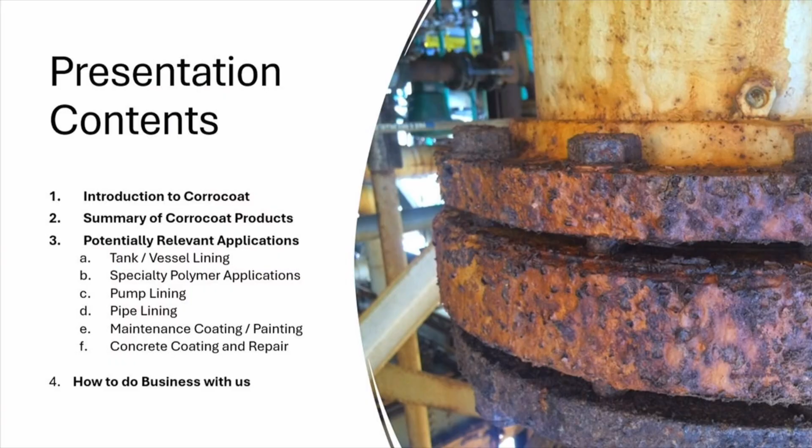So Corrocoat: we exist to engineer corrosion-resistant coating solutions for aggressive service environments, across a variety of substrates — pipes, pumps, concrete, tanks, tank linings, internals, externals, and fiberglass repair. We specialize in the difficult applications. We will do the easy stuff as well, but typically we start with someone saying, 'here, this is my most difficult problem, can you help me solve it?' We're glad to do that.

In the U.S., here's just a snapshot of some of our customers. I'd say about 50% of our business is in energy, whether that's power generation or oil and gas. We also do petrochemical, marine, some food and beverage, and then there's always oddball inquiries. We do some wastewater — wherever there's corrosion that's aggressive enough to warrant the investment to do it right and make something last a long time, or sometimes it won't be as corrosive but access is a problem. Equally, if it costs a lot of money to access something, you don't want to have to do it again.

The Corrocoat business model flows right along with Qualitech to where we can be a single source solution. Qualitech as a licensee is able to apply the product as well as specify and supply it. So Corrocoat operates to where if you have a problem, you contact Cindy, you contact Qualitech. She's going to understand the problem almost like a doctor would. We're going to ask you questions to diagnose what needs to be done. If we have a solution to that, then we'll supply the product and apply it. It's a single source solution.

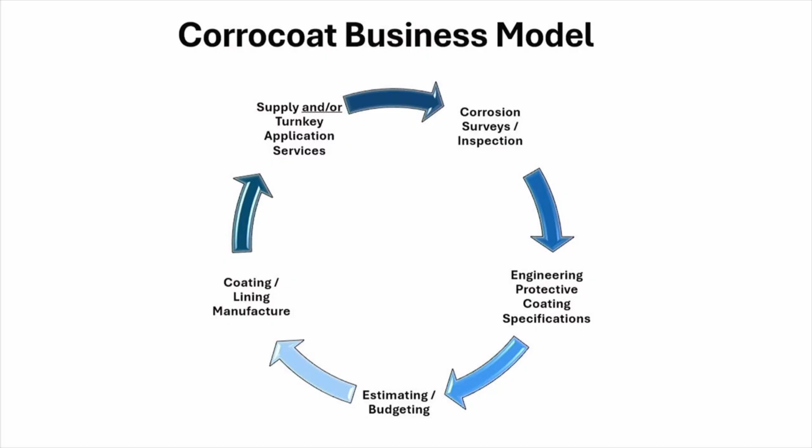We manufacture in five locations: the head office in the UK, and also in the US, India, Kazakhstan, and Japan.

I could also call this 'do it right the second time,' because people usually don't get it right the first time. But when you have a corrosion problem, it's important to understand where the costs really are. Generally it's not in the bucket, despite your paint salesman saying 'I've got a product that works and it's 5% less expensive.' Based on my experience, being a turnkey solution as the contractor as well as the manufacturer, the cost of the coating in the project is only about 5%. Most of the cost is downtime, engineering, access. You see a guy here on scaffolding in an outlet duct, 175 feet off the ground, abrasive blasting - that's where the cost is.

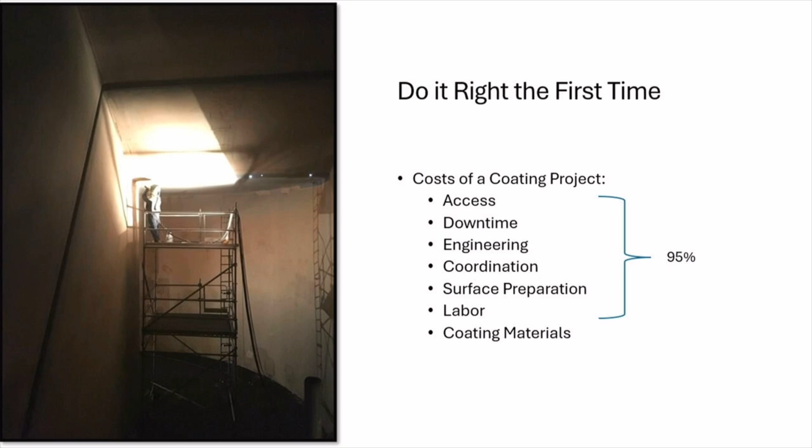It's highly dangerous work to be able to do the correct surface preparation for pretty much any coating that you're going to apply. So if you're going to go through all of that trouble, it's good to get the spec right, and make sure you're dealing with a partner who's going to take full responsibility.

Corrocoat operates naturally on the Pareto principle. I'd say about 80% of our specs end up being glass-flake vinyl ester - that's when we're looking at internal linings. The vinyl ester resin, particularly Novolac vinyl ester resins, have extreme temperature resistance and chemical resistance. That stated, we also make polyester-based resin coatings, also glass-flake reinforced, a variety of different epoxy resin-based coatings, specialty coatings, and surface-tolerant primers for when blasting isn't feasible. So we can do a lot of things with our technology and experience.

We have an in-house R&D that continues to work - a full-time staff and some really expensive equipment in England, so we're always improving our existing coatings and creating new coatings as new technology comes out in resin systems and different additives, in addition to responding to the marketplace. We can make a custom coating to fit your need - it just needs to be something we feel is going to be commercially viable elsewhere. So if something really, really cool comes up, please let us know - that's what keeps me going. We may or may not be able to cater to that.

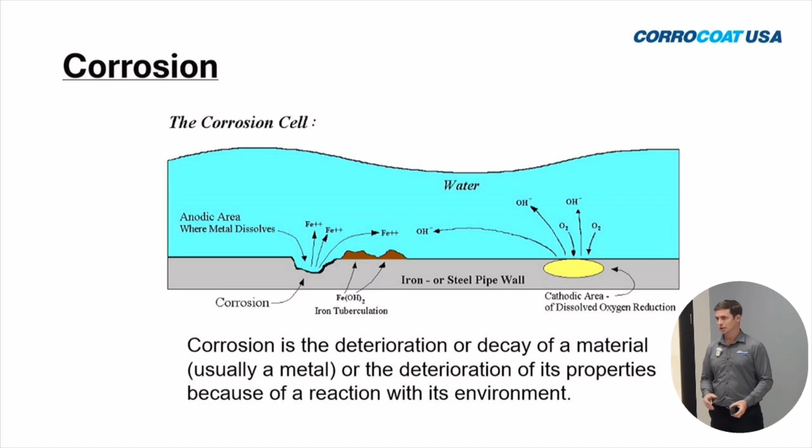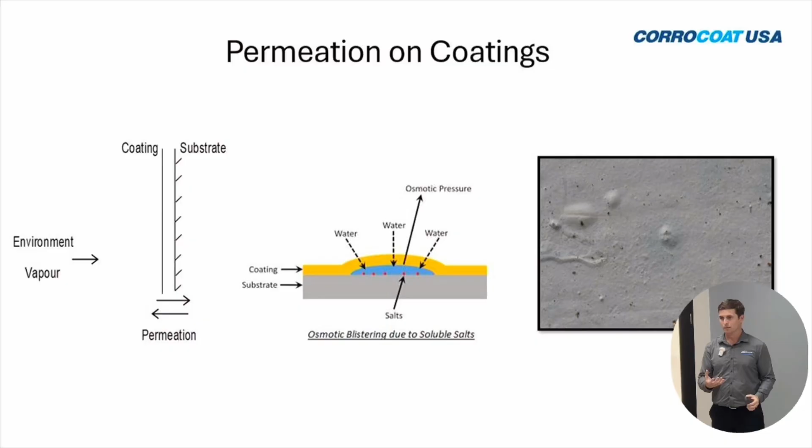We look to protect it. Practically, as you can see in this picture, whenever you're looking at fabric maintenance or internal linings, over time you may see permeation through the given coating film, which will allow moisture or other corrosion-causing ions to get through the film and to the substrate. It starts to corrode, you get a bubble. The reason that happens is because you have a tendency towards permeation. When you have a film between differential pressures, gas is going to want to try to fill that void. That's the natural phenomenon that we're fighting.

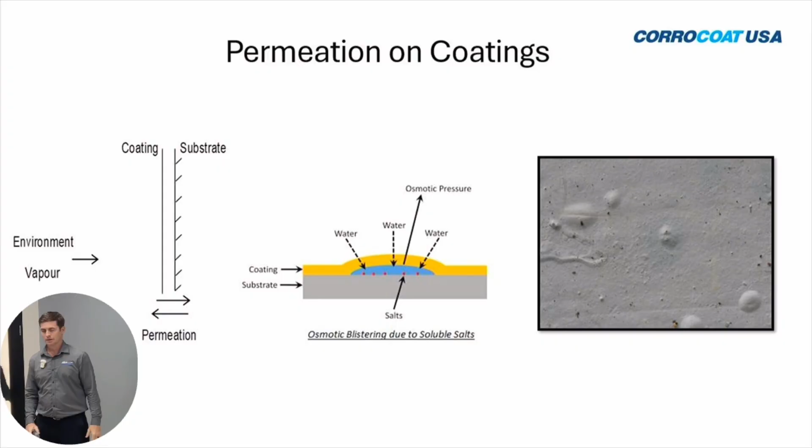Corrocoat is based on glass-flake technology. In the early 70s, the founder of Corrocoat, while still working his regular job, started tinkering with resins and glass flakes in his garage until he found a formulation that he liked.

The idea is that if you put glass flakes in a coating and load them correctly, and put other additives and fillers to ensure you get the viscosity right, you can create a situation where the corrosion-causing ions go into a tortuous path.

These are free film samples of coating, but they work here as well. Imagine these were glass flakes, 3 microns by 100 microns, so 3 microns thick by 100 microns diameter. For reference, the average human hair is about 70 microns diameter. So we're talking about really small chemistry or physical properties.

Within that layer, you've created a situation where you lose momentum, and now you have a liquid-applied barrier coating. Without the glass flakes, or something that has a shape and will line up like that, you have to put more coating on to get the same resistance to permeation.

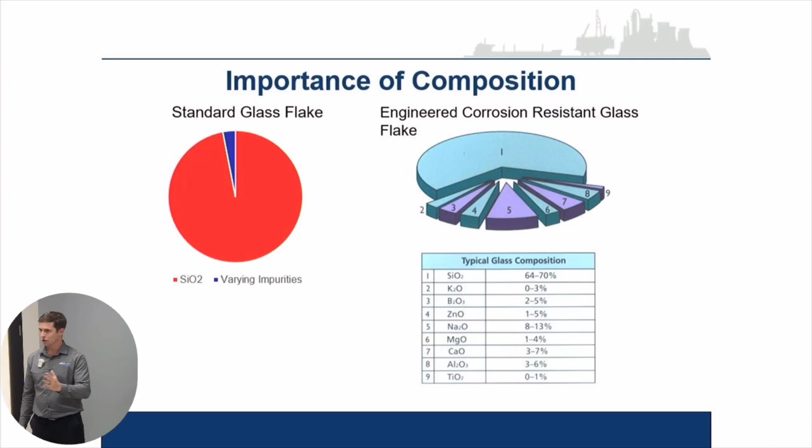So that we have extra corrosion resistant glass flake, the idea is that in heavy chemical environments, it's not good enough to only have that tortuous path with water. You also want a glass flake and resin system that will resist and is inert to a wide range of chemicals. So the glass flake is the backbone of these coatings. The resin selection varies depending on temperature, chemicals, and service, but having that effective glass flake loading is what really, really makes us different.

We don't just pour the glass flake into a vat, spin it around and say, yeah, that's good. We do extensive testing when we're creating coatings and when we're testing against different service environments, sometimes to prove to ourselves, sometimes to prove to customers. So these are 4 of about 2 dozen tests.

So we'll do the cold wall test. Has anybody heard of the cold wall test? An Atlas cell test? No. The cold wall test utilizes coated plates and a translucent tube. The beauty of this, particularly when you're testing for high pressure or high temperature and chemical, is you can put a given chemical in there, the exact same chemical, to mimic the environment, alter the pressure and alter the temperature to ensure that you can handle that.

Now, we don't only do that for the operating environment. Most customers will want us to do that test for the maximum operating temperature or in upset conditions. We will test it to failure in some cases because you want to know how far the coating will go. Whenever you're looking at separation vessels and process vessels, you want to know the limit because these are really, really important vessels to a process. That $100,000 tank lining is a drop in the bucket compared to the downtime for some of these things.

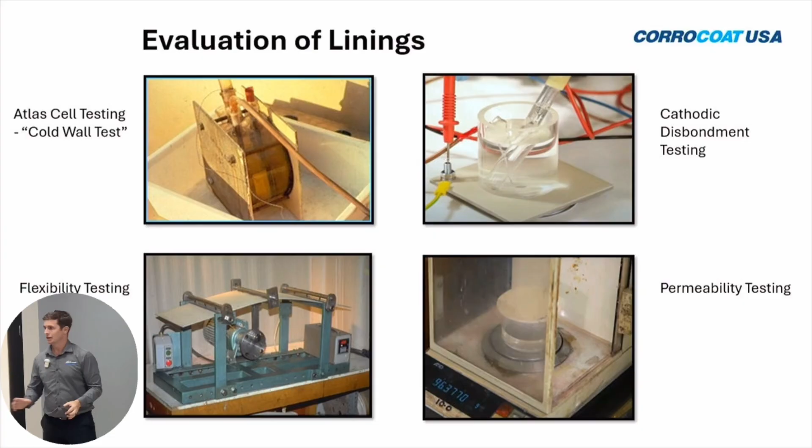And then, of course, permeability testing. This test uses a free film sample, kind of like this. You put water in here, you have variable pressures and time, and then you monitor how much water is lost. It's a relatively simple test, but it's standard: ASTM D1653, for those of you who want to look it up later.

We've seen, one of the tests, is the product with the glass flake much better than that resin system in fiberglass. So we'll do that. Good science only changes one variable, and then you monitor the results. We're a full magnitude less than a lot of the competing glass flake coatings, and even less as far as permeation than fiberglass.

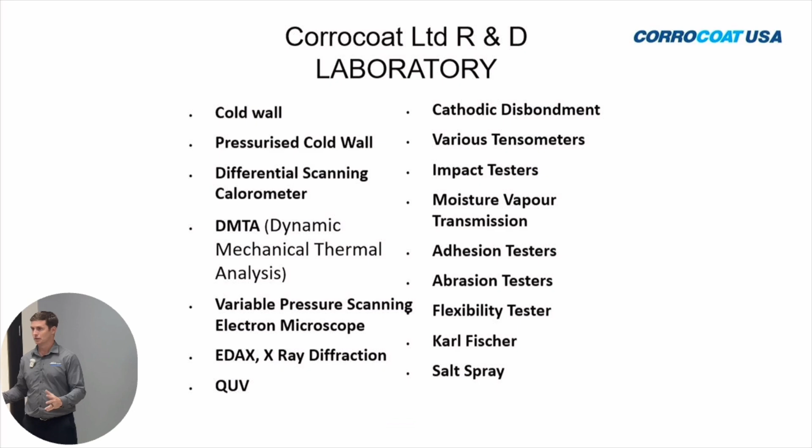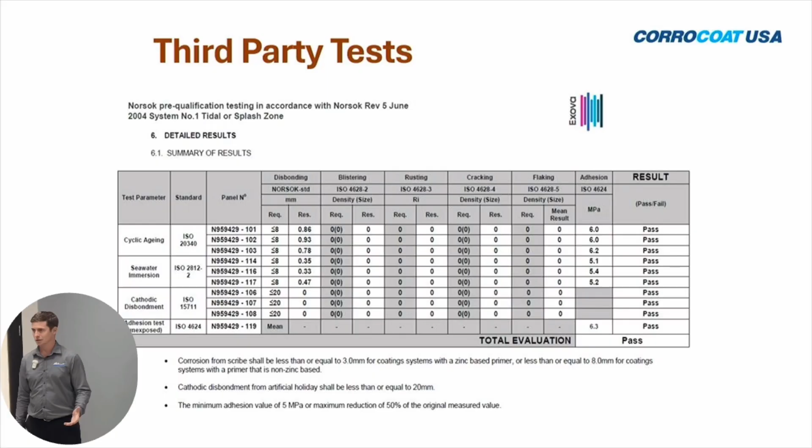So just keep that in mind - sometimes we will do that as an additional service. Not everybody takes our word for it; sometimes they want third-party testing, and we're happy to do that. If you want comparative testing, and you have the money, we're happy to do that as well. I've done very well in comparative testing over the years against all of the big boys, all of the names that you may have heard of.

All right, so Corrocoat specialty coatings. We talked a little bit about the VE, and I told you about the Pareto principle. We spec it a lot, so bear with me - pH 1 to 13, up to 230F.

We're going to talk about Corrothane XT in a minute as well. I have some slides dedicated to these. Corrothane XT is a high temperature version of the VEF - it's a vinyl ester urethane copolymer. That'll get up to 300 F immersed, and 500 F non-immersed.

We have the AR4. So the Novolac vinyl ester is really good - it uses cobalt as a promoter. The problem with cobalt is in high pH situations, the cobalt can be attacked. So we will substitute the brominated vinyl ester, the Corroglass AR4, in those situations. I think we're doing a project with AR4 coming up at Promont. The downside to the AR4 and the bromine, the reason why we don't use it on everything as a promoter, is it's not as good of a promoter as the cobalt, so you have to add heat to get a full cure. Still, it is the best solution around.

We can handle fully saturated concentrations of sodium hypo, sodium hydroxide, all of the good stuff whenever you're looking at caustics. I mean, I guess alum would be the only other one that you would ever see.

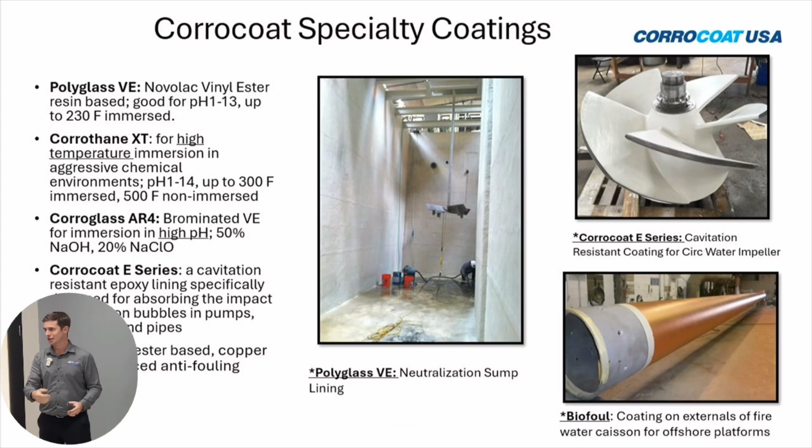Yeah, so the biofoul is a polyester resin-based coating that utilizes elemental copper flake. The copper emits ions, which the biological growth will not adhere to. So it's not like your traditional anti-foulant, which is ablative, which has multiple colors and multiple coats, and the fouling just peels off - and then you get to green and you say, I need to coat again. This is a fully functional, long-lasting barrier coating.

So some of the epoxy coatings, Plasmet ZF - this is our surface-tolerant epoxy coating. It utilizes glass-flake and micaceous iron oxide. You fight rust with rust in that situation. And then other proprietary components which help increase the passivation of the surface as well as make it surface tolerant.

We've been fortunate enough - and I have other slides, so I don't want to duplicate too much. About 7 years ago, one of the big players in the oil and gas world asked us to put this product, Plasmet ZF, in an aerosol can. We're able to do that. Give it a little cliffhanger - we'll talk more about it in a little while.

Plasmet AR3, which you're using at Promont as well. The AR3 is 98% sulfuric acid resistant - that's for full immersion or for secondary containments. In general industry, I see a lot of inquiries for secondary containments or maybe U-drains, which are particularly nasty and fun to deal with.

We have the Zip E. So you see a picture here - this is a project that we did 8 or 9 years ago in South Carolina. On the bridge going to Hilton Head, South Carolina, there are 2 transmission poles like this. One of them, they had too deep, so it's in the tidal zone.

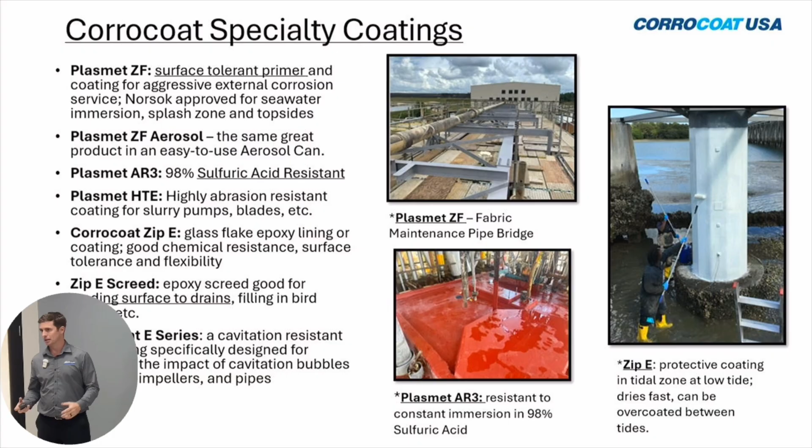So the tide went back up, we went back through again. Even though it had been in water, it was still in its active phase of polymerization. So we wiped it down, put 2 more coats on, still fine. It's perfect. These are the type of mission impossibles that Corrocoat thrives in.

Application characteristics. So it's more than just the glass flake, and it's more than just the physical properties and the chemical properties of the resins. You also want to understand application characteristics.

Gel time, pot life, just a few vocabulary words. So pot life or gel time, that's the time it takes between when you mix the part A and the part B for it to go from a liquid to a solid.

Shelf life, generally that's pretty static for us. So the vinyl esters are getting 6 months, the polyesters are getting a year. The epoxy coatings are stated at 2 years, but we've seen them last much, much, much longer.

Viscosity, so I have a couple pictures here to illustrate viscosity. One of the levers that we can pull whenever we're making coatings to make them effective for the given use is viscosity. So the same chemistry and the same service, the same resistance, but in 2 different thicknesses.

In certain cases, like whenever you're looking at a cove base or when you're trying to fill pits, you want something that's thick and can be trowel applied. In this case, they're using a little Bondo knife.

And then in other cases, we have a blind vane on a pump. You want it to be so thin that it's pourable. We were able to rig up a caulking gun, essentially, to pump. We mixed it up and we were able to pump the coating in so that it drained out in this blind vane. You move it around, you look at it with a mirror, you literally rinse and repeat.

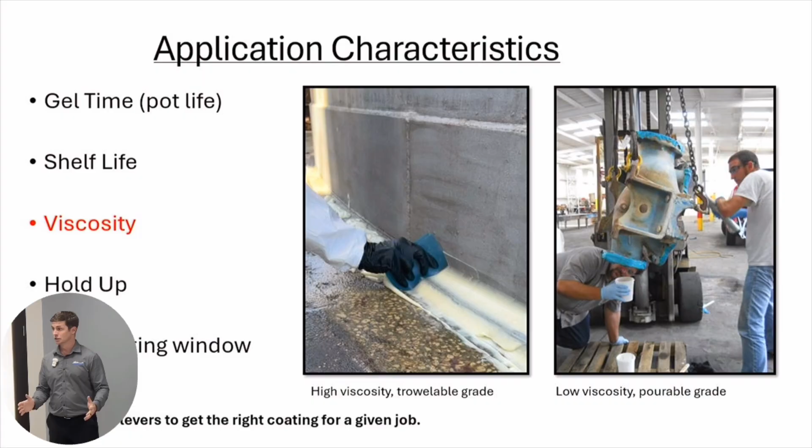If you miss that overcoating window, you don't have to start over. You typically will just have to sweep blast and get a new profile onto the surface, which can be expensive. It's not ideal, it's not the end of the world, but it does cost more. So when we plan projects for given coatings, we want to understand their overcoating window so that sometimes you may have to work odd shifts, you may have to have 2 shifts, or you may just resolve: I'm going to put a coat on and then I'm going to miss it and then I'm going to sweep blast.

Understanding the whole process is important, particularly whenever you're dealing with this sort of stuff, so that you can have a project from start to finish that lasts and works and doesn't cost an arm and a leg.

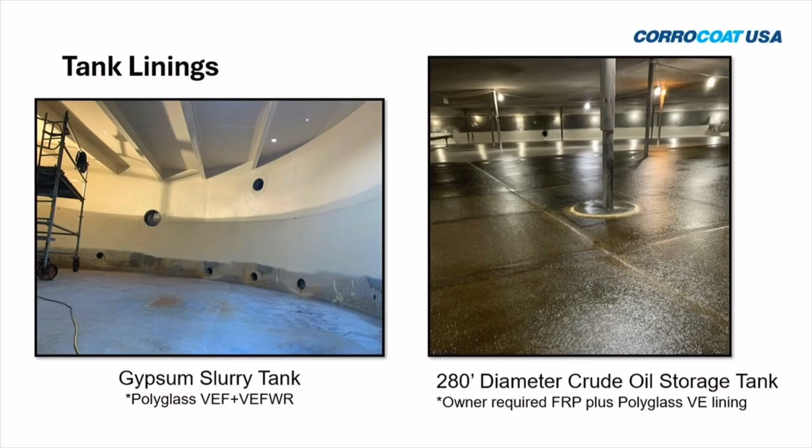We supplied coating for this system. We prefer turnkey, but in certain situations there are nested contractors where it makes sense for us to just supply the coating and or support. So if you're offshore and it's a relatively straightforward application, that might be the way - you buy the buckets, and ideally you may want to get some support as well from Qualitech. This is a 280-foot diameter crude oil storage tank - 2 40-foot containers full, so about 8,000 gallons worth of coating. A lot of coating.

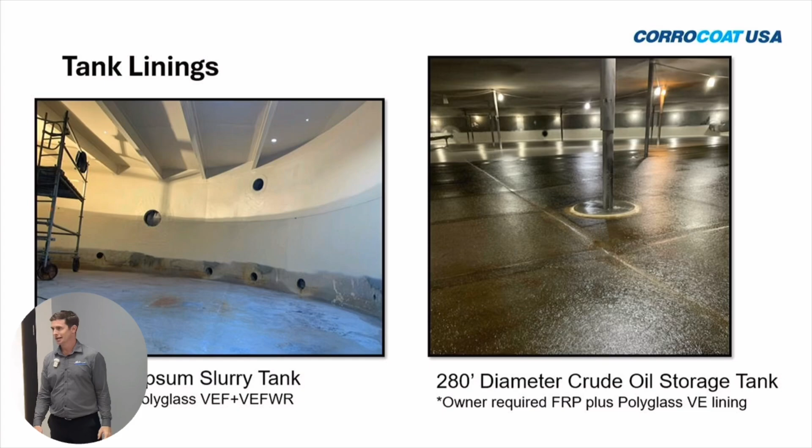This is just a cool picture. It's a process tank that we did. Whenever we're looking at process tanks, it's important to understand the sequencing. If I ask you for an inquiry on a process tank, I want more than just 'it has hydrogen peroxide and it's dosed with hydrochloric acid at 10%.' I do need that information, but I also need to know the sequencing and what the base is. I want to understand if we're going to worry about exothermic reactions that may or may not be beyond the temperature resistance of the coating. I want to understand whether what you're dosing in there is miscible with the solution. If it's not miscible, you may have a hot spot. If you put 20% hydrogen peroxide into a tank, but you're only putting in 1% of it, that's not a very high concentration - the coating will handle it. But if it's not miscible in the tank and it falls to the bottom, now that might be beyond the chemical resistance of the coating. These little details can be the difference between a successful project and one that's a really big problem for everybody involved.

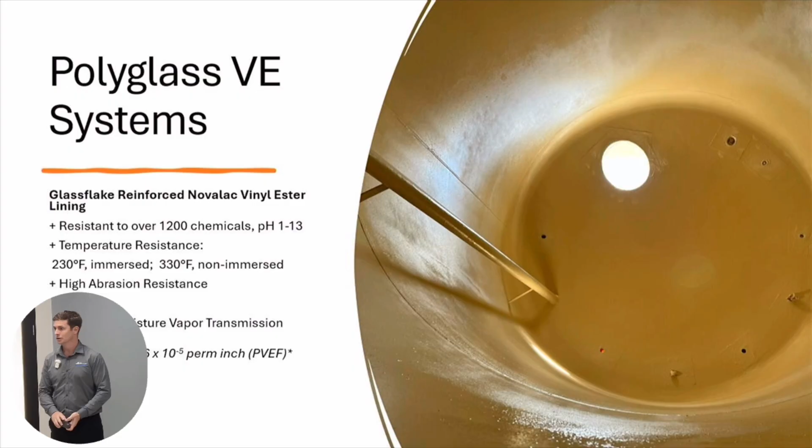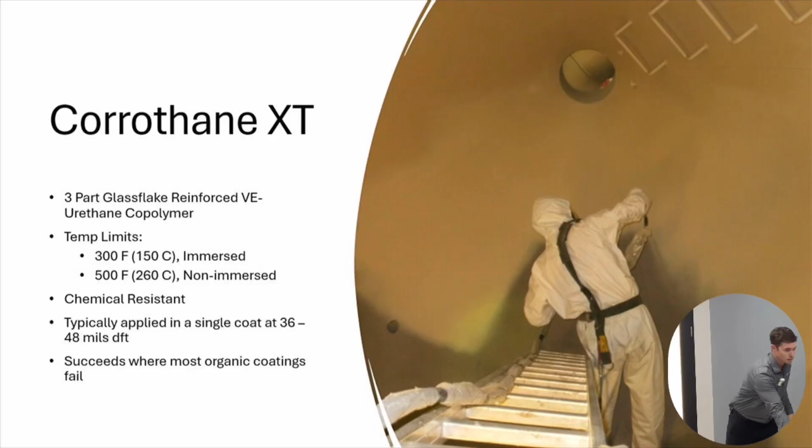Corrothane XT - there we go. I've got C on here, 150C, 260C. So the Corrothane XT works a little differently - you actually have to mix it. It's a step-down mix. You mix in the urethane and the urethane diisocyanate, which will catalyze the urethane. You let that sit, then you mix in the MEKP, the organic peroxide, which catalyzes the vinyl ester. You step that and you time it. The idea is you get a thixotrope of each material, the urethane and the vinyl ester, and they wrap around each other like two ropes, or like two snakes mating. The idea is you have this double thixotrope wrapped around like a really sturdy rope. Whenever the temperature rises, those thixotropes expand and close the gap, so you have an even better moisture vapor transmission resistance. That's the difference between this product and the standard vinyl ester. This is a product that will succeed where a lot of other coatings can't.

We'll use this in ion exchange vessels that are high temperature. Test separators - a lot of times the VE will work fine in the production separators, but the test separators, where you're going to see higher temperature, it works well there. For CUI, corrosion under insulation, you want to specify for the immersion conditions, not the non-immersion conditions. If you're having CUI, it's because you have moisture on the surface. That's a common problem with specifying corrosion under insulation - excuse me, you look at the wrong number.

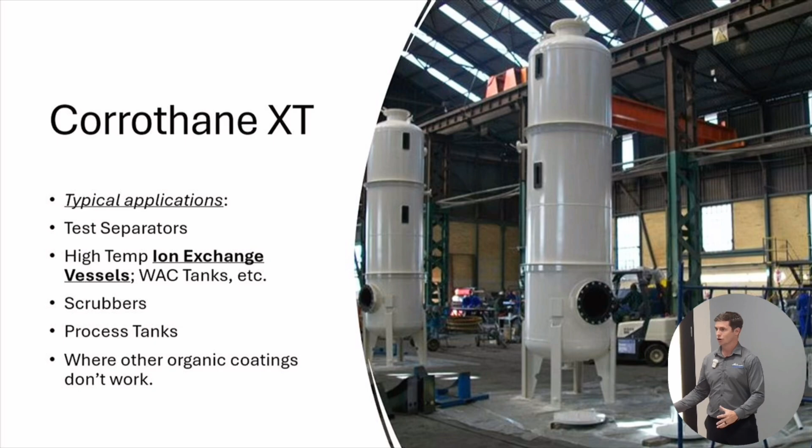So this is a specialty coating. This is the type of coating that only Qualitech would be able to apply. Certain applications and coatings, we're not going to sell in a bucket and give you support. We're going to say we're going to do it all. It's our reputation on the line, or we're not going to do it.

Different types of tanks and vessels. Do y'all have tank and vessel linings that you deal with, or is it mostly fabric maintenance? Some, yeah.

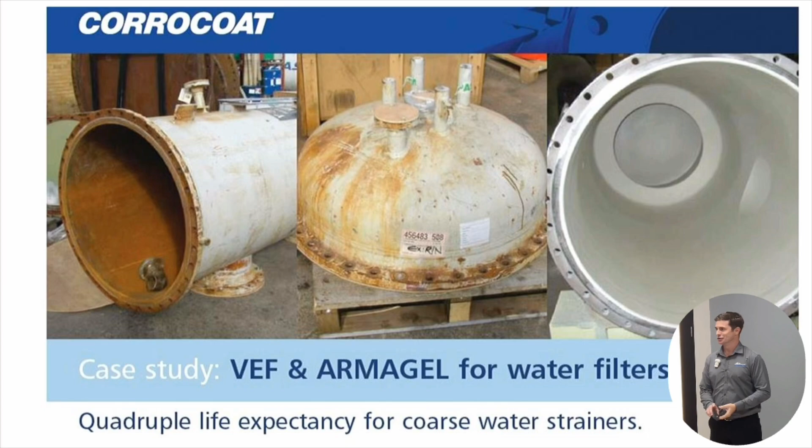Water filters, you know, you get abrasion in certain situations. Armagel is just an earlier evolution of the VEFWR. I actually like the name better, but as you move along, you create new names.

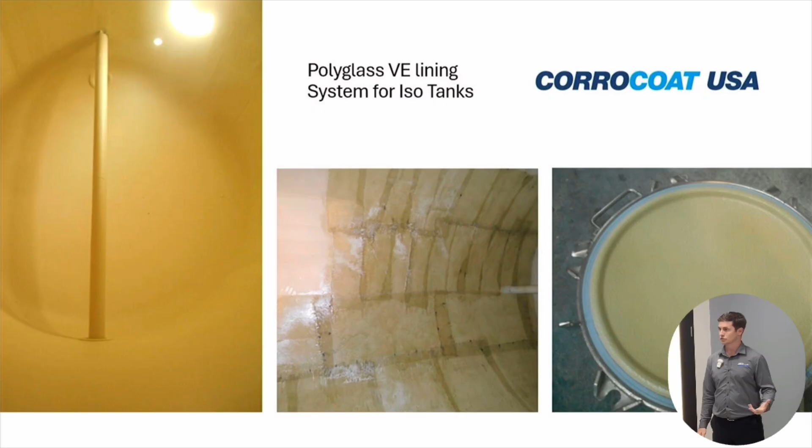Isotainers. This is a hydrochloric acid isotainer. This also works well with frac tanks or produced water tanks, some other bad actors that you may be dealing with.

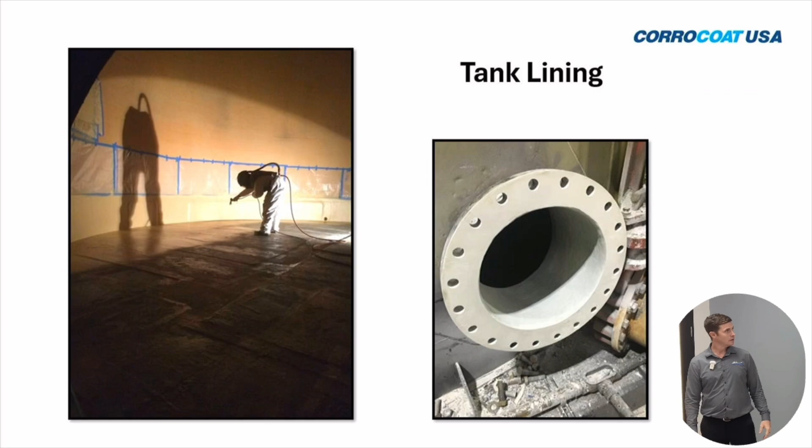You can see this flange here, it's finished flat. We have a better method of dealing with a flange, but in situ, on a big flange like this, it works pretty well. So you see, we'll fiberglass it out.

We make free film samples with the coating. We use those as shims. We essentially glue them to the substrate here. Then we clamp down a piece of laminar board. Wait about 4 hours, pull it off, and then you get a flat flange.

It's much more effective. It leaves a flat finish, plus or minus 0.005. Easy to go onto, particularly with a soft gasket, and it's done. In other situations, I've seen before we started doing this, others spend as much time on the flange faces as they do on the whole tank. So you want to be able to have effective methods like this.

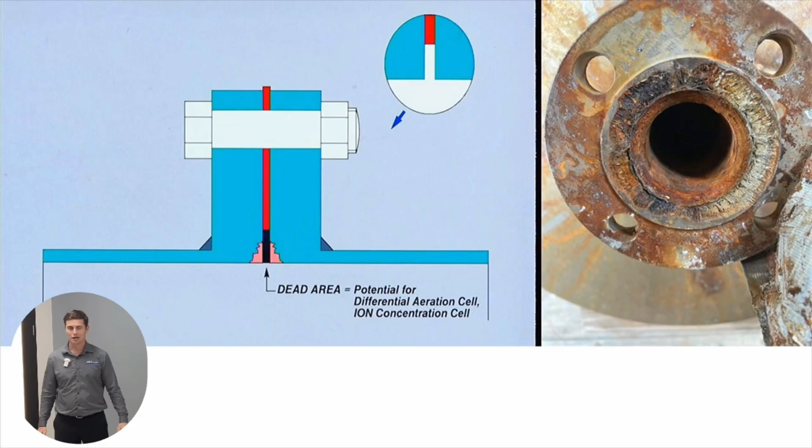Now, do you have any flanges that look like this? Crevice corrosion, it's pretty prevalent. It's the small areas that cause us the biggest problem, it seems like. We deal with that with a spec, I don't know if you've seen it, where we recommend that you rebate the flange down 60 thousandths on the ID. That works great, you fill it with coating.

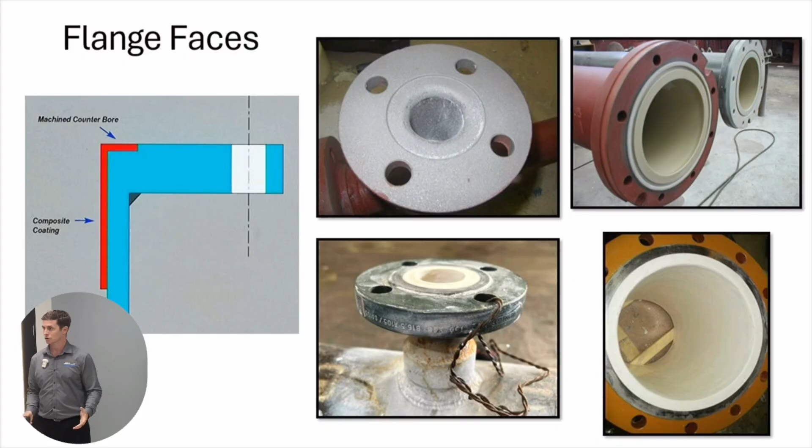The coatings are fully machinable. You can put it on a lathe if that's possible to machine it, but you don't really have to. We're able to get plus or minus 5 thousandths, which is the BP spec, right here, no problem without machining. Some of the more abrasion-resistant coatings are only machinable with a diamond tip. This is some polymer chemistry that has really, really good cross-dimensional stability, and it's very hard.

In situations where you're really in trouble and maybe you spec the wrong metallurgy, you may need to be able to do something in situ. This is a project I went out to help with this summer in the Gulf of America. This is something where we used a casting method. I brought the 1.5 inch because it was easier to fit in the bag.

We fabricate with our machine shop, and Qualitech can do the same, flange formers to spec. So this is a 300-pound flange, raised face, with 125 RMS finish. We sent those offshore. We sent a crew offshore with coating, the Plasmet HT coating.

You paint this with a bond release agent. You blast the coating, or you blast the surface of the flange. I mean, these flanges were eaten up. They were losing seals, it was a major problem.

Fill in the pits, prime it, bolt this to the surface, like you can see my colleague here. Leave it, you torque it down, leave it in place for 4 to 6 hours, pull it off, finish it, and you're done. We did 94 flanges in 9 working days.

The competing solution was going to be 48 flanges in 16 working days. They were on a 12,000 barrel a day deferral for the project. So significant savings using Corrocoat as opposed to the competing method.

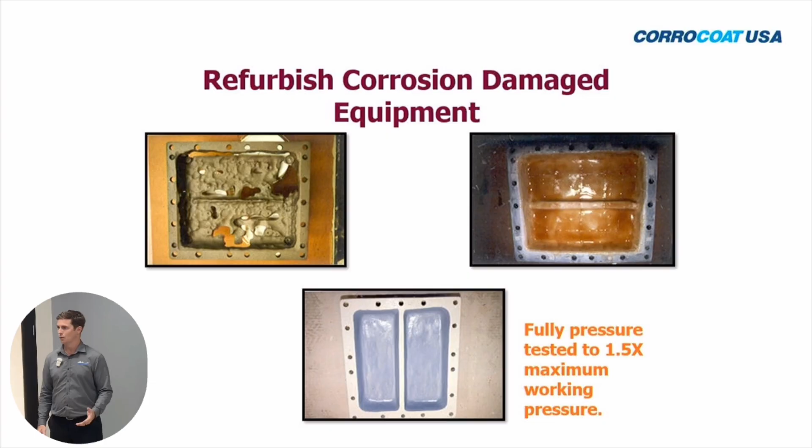We can use cold welds. This is a project that we did 90 feet up at a pulp and paper mill in a bleaching tower. The bleaching tower had 10% sodium hypo at 180 degrees F, which is 80 C. It was a tile-lined tank. The tile failed, and they had a gaping hole here up at the top.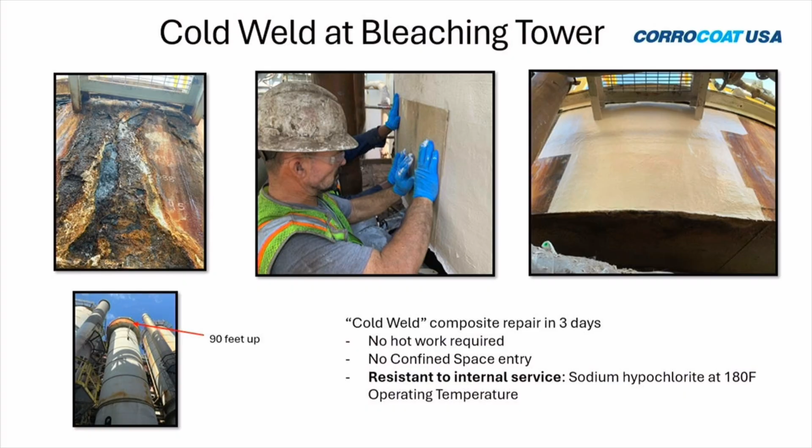They had a short outage. They had other work going on in the area. They couldn't do hot work, like a lot of your plants don't like hot work. So we were able to prefabricate a free film sample to the curvature of the tank, coated it on the back end. We vapor blasted, primed the surface with the coating, and then essentially glued it in with our coatings. As you can see, the finished product is going to last longer than the tank. They're never going to have to worry about that again.

Pipe wrapping. So we can do a similar situation with fiberglass and with our composite materials with pipe wrapping. I'm sure you've done pipe wrapping with other materials. You buy them on the open market. It's not something that Corrocoat invented. We can just do it very well.

We have an ISO certified process with this pipe wrapping. It's based on a training regime which Ramphal and Cindy went through during their 3 weeks training in January. It gives you a little extra assurance. The first part is we analyze the problem, and then we will work with an engineer to do an FEA and a design requirement. We get that stamped design, and then we go execute it using our CSR materials. CSR stands for composite structural repair.

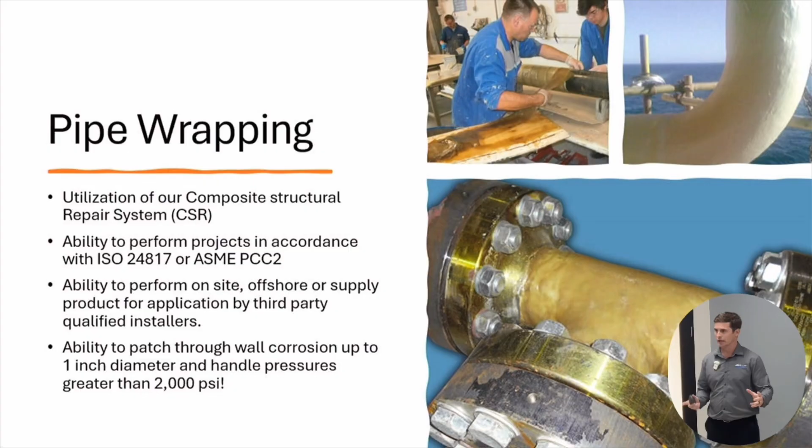There's a really good video online that shows how we can deal with through-wall corrosion, pressure tested at plus 250 bar, even at a 25 millimeter diameter. There are different classes when you're looking at the ISO. You've got the low spec duty: static head, drains, cooling medium. Class 2 might be fire water and deluge systems. And then you've got your hydrocarbons, flammables, and class 3.

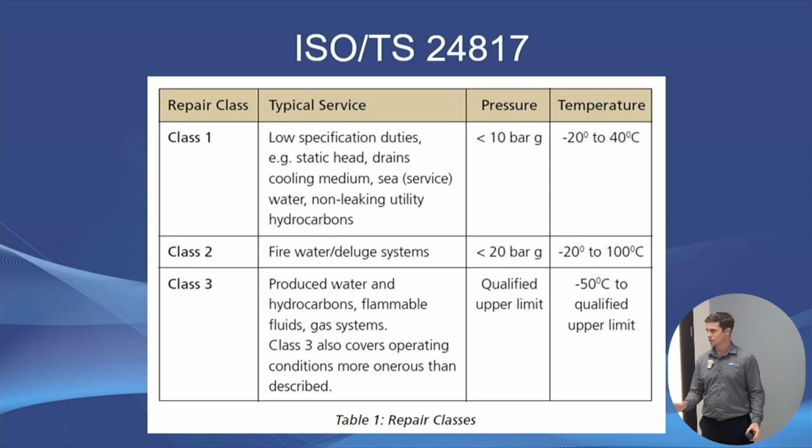We don't just go out with some fiberglass and resin and wrap your pipe real quick. We could, but that's not what you want. You want to have something with quality assurance and reliability, so it's a process. This is something that Qualitech can spec, and then they can also stock, and it's just a matter of having relationships with engineers to have a very quick turnaround. So just keep us in mind whenever you have problems on your pipes and need to do pipe wrapping. It can really, really get you out of a jam.

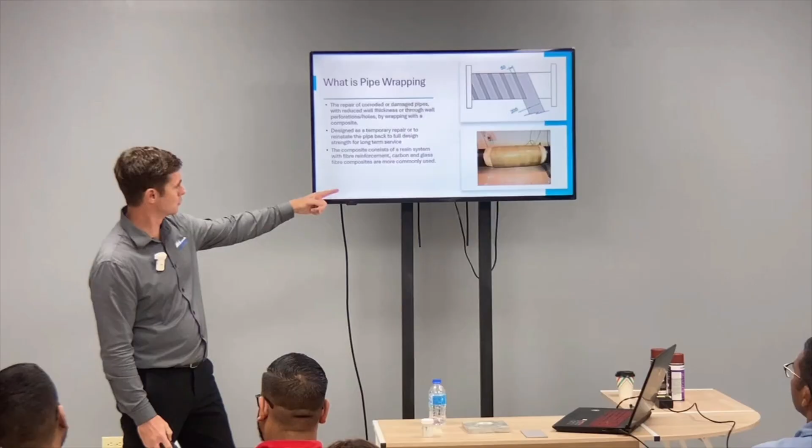Here's a picture of some pipe wrapping in the lab. The designs vary depending on the situation. But you have multiple layers of laminate, then you sandwich it with coating, so on and so forth. It ends up looking like a Big Mac that you wouldn't want to eat, but it'll work really well whenever you're looking at reducing corrosion.

Tube sheets. Oh, yes, go ahead. Thanks.

Just want to find out if the pipe wraps can be used for online leak sealing, or is that specific to FRP piping only? No, it would be for steel piping as well, but it does need to be out of service. Okay, thanks.

Tube sheets - in certain industries, you metal up for your tube sheets. Still, sometimes the metallurgy doesn't work and you need to coat it. We can do tube sheets. It's a young man's game because it requires very small plugs, so arthritis doesn't work very well. We do have young men at Qualitech, and women. We can do these projects as needed. We specify according to the service you're looking for.

So water boxes, heat exchangers, tube sheets, channel heads - for some reason this piece of equipment has many names across different industries and across the world.

We can use refurbishment techniques on cooling water lids like this, water box lids. You can see it's eaten out. This is one of our main customers in the U.S., a power plant. Before we were out there, we were a nested contractor out there. We have full-time presence. They were just throwing these away. No more - we can do that refurbishment in a matter of about 3 days comfortably. If they needed it quicker, we could probably get it done in 36 hours.

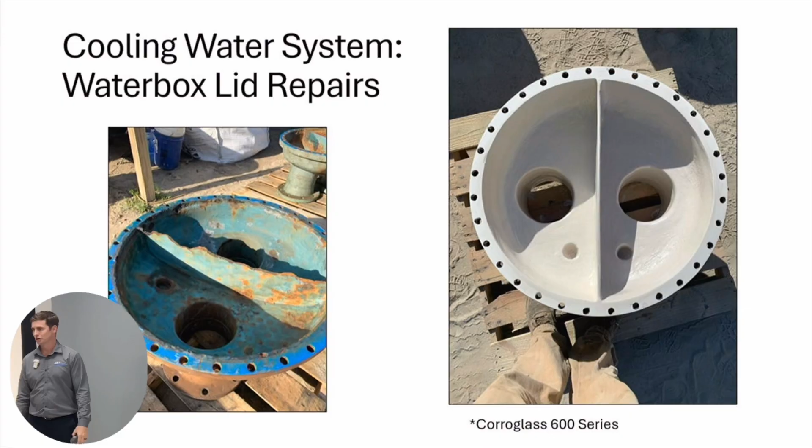Pump linings and pump refurbishments. Qualitech are specialists in pumps. They supply pumps, they refurbish pumps. This is really a sweet spot for this operation.

When you use coatings to refurbish pumps, one, you reduce the friction based on filling pits and having a higher functioning pump. And then we have top coats called Fluiglide and Fluiglide E, which are hydrophobic, kind of like Rain-X that you put on your windshield, and they reduce the friction. When you utilize those top coats, you can have increased efficiency even from a new pump. The idea is that you have less energy input to get the same output. On a pump that's big enough, the project can pay for itself in a matter of weeks with the savings of energy. So this is a situation where the accounting department will actually like it, and the production department will like it, and it's not as much of a maintenance issue if you have the right perspective.

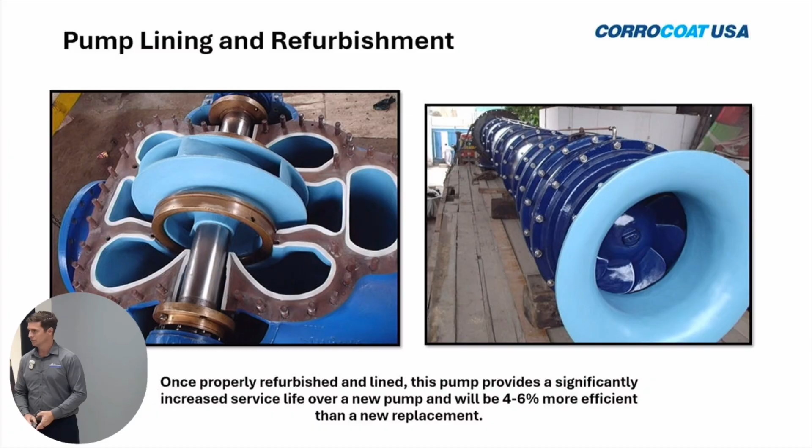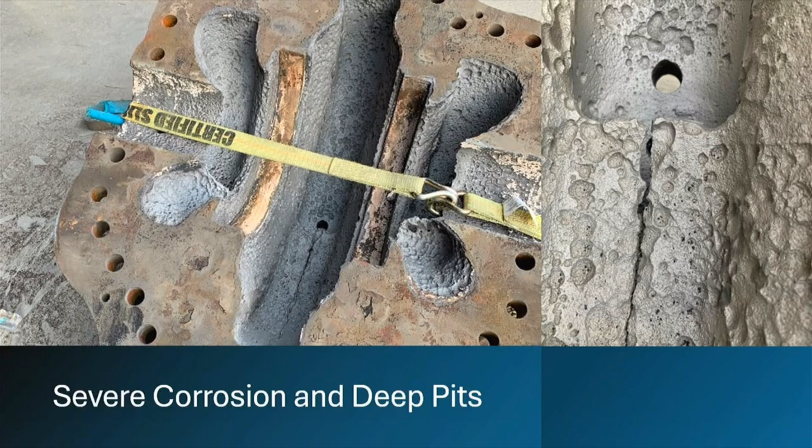This is a picture of one of 6 pumps that we did for NASA. These are cast pumps, and it was going to be an 8-month lead time, so NASA said we need it done pretty quick. We've neglected these things - they just sit in salt water. These pumps are used to flood the launch pad after a rocket takes off.

The size of these, it's about to scale. You can stick your thumb in these pits - it was really eaten up. We're able to use our materials to fill the pits and line it and put the hydrophobic top coat on, so that now you have a fully refurbished pump in a fraction of the time and a fraction of the cost. You can even use your materials to cast - we use the shaft to cast the bearing edges. There's a lot of really cool stuff we can do with our materials. We're much more than just coaters or painters.

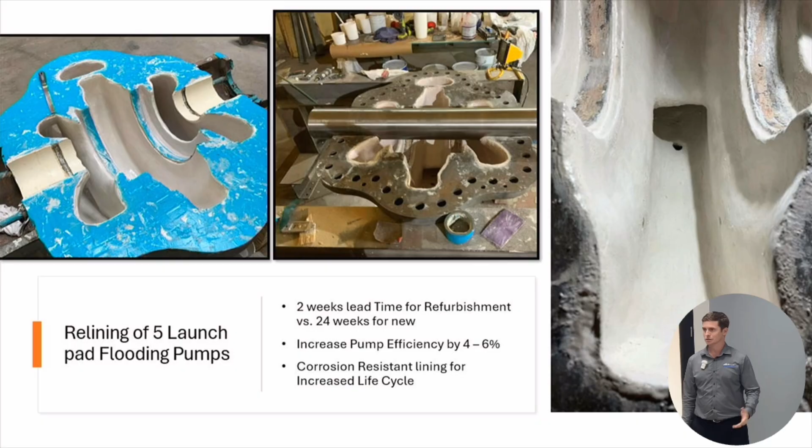Pipelining - is that something that might interest you? Do you have internal pipe corrosion? Yeah, maybe so. We do a lot of pipelining, particularly for the oil and gas industry. It's not cheap - we're in Florida, and a lot of the oil and gas industry work happens in Louisiana. Despite that 9-hour drive, they're fabbing in Louisiana, shipping their pipes to Corrocoat USA. We reline them and ship them back. The reason is, in a service and produced water service for given owners where they're getting 18 months because it might be some particularly nasty water, we're able to get 12 years and counting. So that's a huge value proposition, particularly if these are offshore pipes where access is difficult.

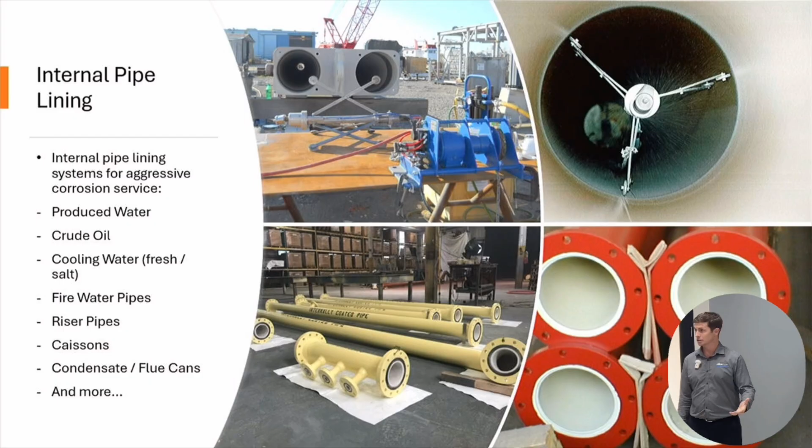Just to read from the slides, which is not ideal - fire water pipes, riser pipes, produced water, crude oil, a variety of different services. That condensate is something that can be a bad actor. There's a lot of areas where pipelining makes sense.

The first step with pipelining, typically when they are replacing something and want to go back with something they don't want to replace so often, is we'll have a negotiation with the mechanical engineer. Piping engineers are taught to reduce the number of flanges to a minimum because it's an integrity issue, but we need access for coating and for QA/QC. So I get a set of ISOs, I'll go through and mark them up, and I know that the more flanges, the more expensive this thing's going to be.

So I'll look at what we can actually do. We mark them up with the flanges and send it back to the mechanical engineer before we even go for pricing, and then we negotiate. Sometimes on the ISOs, I don't know where the structural members are, I don't know where intersections are, so we may have to figure out other ways to skin the cat.

For surface preparation, we have a pipe blaster for 8-inch to 48-inch pipes. This goes on a winch, and it pulls back just like our pipe sprayer, which I'll talk about next. It has 3 heads, rotates, and blasts on the internal surface of the pipe. This is made by our sister company, Agmec.

Commercially available for smaller pipes, we use the hollow blast. This uses ricochet, so you have a cone-shaped apparatus at the beginning. You blast onto it and it ricochets into the center of the pipe. You pull it back or push it in.

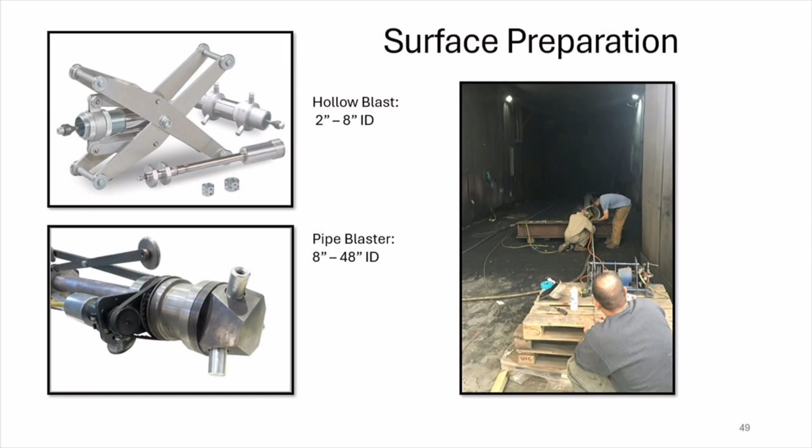In certain situations, we've partnered with technology providers throughout the world. We can put these pipe blasters and pipe sprayers on robots. There's some really, really cool technology out there if time and money permit.

The pipe sprayer is what we use primarily if we're doing pipes in situ, and oftentimes also in the shop, depending on the pipe geometry.

The pipe sprayer operates off of a standard airless pump. You pump the coating through the hose, and the coating goes into a cup. There's actually no spray tip like you'd generally see with someone using a spray tip—it just goes to the cup.

There are 2 motors on here—one on the end and one on the head. They spin simultaneously. These motors are very delicate. They're encased, but they're actually used in the dentist industry sometimes. It's specialized equipment we're talking about here. It distributes the coating centrifugally, and now you have the pipe.

I do have a little video. The finish isn't great—this is an 8-inch pipe. I use the standard pipe sprayer, which goes from 4 to 48 inches. I think when we did this, our mini pipe sprayer was down, so we had to use that. But the efficacy is there.

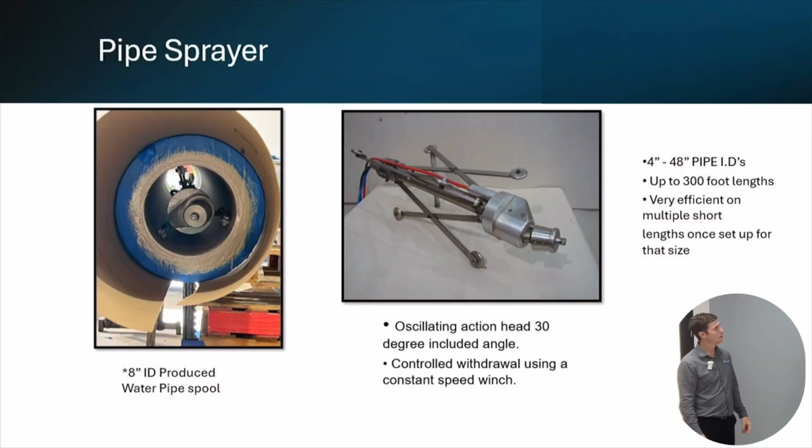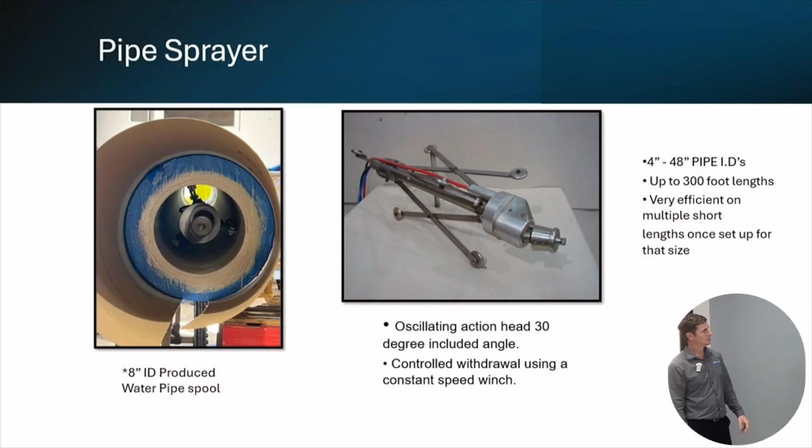You can see it's pulled back by a constant speed winch.

The idea is before you go, you have to get the flow rate correct—the amount of flow going—and then also the speed at which the winch operates, and that's how you vary the thickness and keep it consistent. It's angled at 30 degrees, as you saw, to mimic a spray pattern. If it was spraying perpendicular, you would risk having a shadowing effect at the welds. So it's important for this equipment to be correct.

We created it for this project.

The offshore provider in 1989 had a problem that was going to cause them a lot of pain, where they needed a new manifold for their crude oil—a very central part of the platform. They ordered a super duplex manifold that had an 18-month lead time. So they called Corrocoat and said, I don't know if it's possible, but can you figure out a way to line this pipe just to get us through 18 months until the super duplex manifold gets out here?

We created the pipe sprayer for this project, lined it, and then once the super duplex came in, they did an inspection. The coating was fine—it had filled in the pits, the coating was perfectly fine. So they sent that manifold to another platform, and the coating stayed in place for 24 years until they decommissioned the platform. This is sour crude in the North Sea, so it's a relatively aggressive environment.

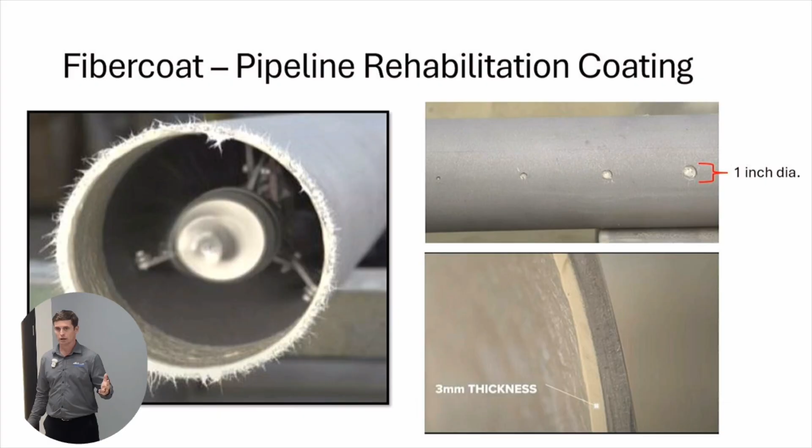This is a really good way to get you out of a jam. It'll go on at about 3 millimeters per coat. Generally, we want to go on two passes so that we can get full, uniform coverage.

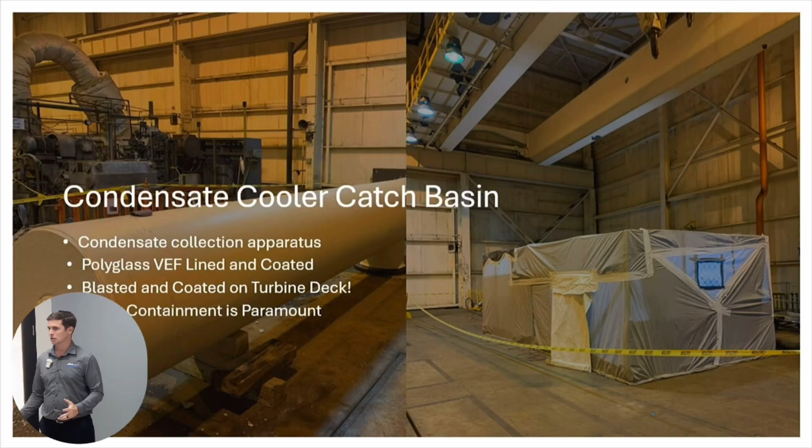Condensate cooler catch basins. The condensate lines in given plants can be a bad actor. This is at the turbine building for a coal-fired power plant. The turbine is the money section of the plant. It's essentially a clean room. So in order to be trusted to do blasting in there, they need to be really, really sure that you're going to be able to build a good containment and have it negatively pressurized.

If you have areas in your plants where you need to do that, Corrocoat have become really, really good tent builders. So we can build that containment. We can utilize equipment to have a negative airspace so that you don't have any blast abrasive that gets into the atmosphere.

So you may have linings, smaller or big projects like this, that are distressed, and it's a lot of surface area, and you have limited time. You're having to deal with holes and do weld repairs consistently. Maybe you don't have the time or money to reline it completely. A half measure is to sweep blast it.

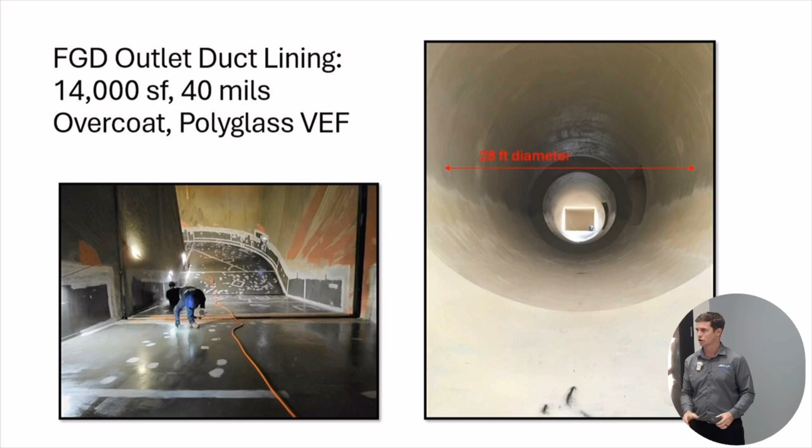So you just sweep blast it to SP7. That's going to expose your weak areas. It'll pop off, and if there's holes, you may have a welder that works with us. We did in this project. They weld that up, and then you overcoat the whole thing. So you put a new film over a swept blast surface that has the profile. Make sense?

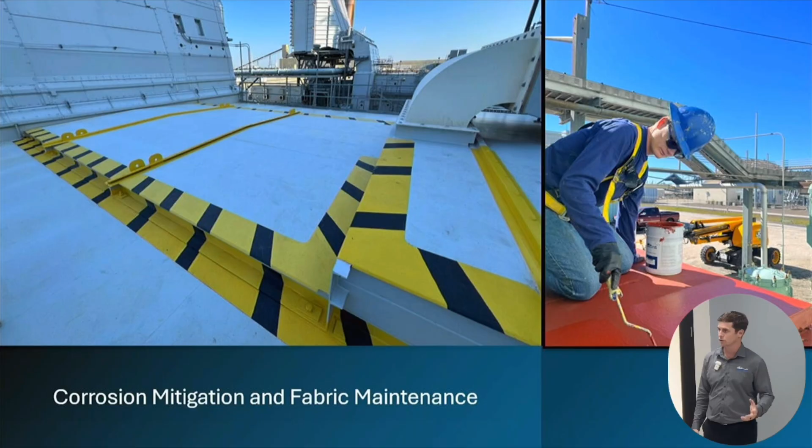Fabric maintenance. We utilize the Plasmet ZF for a lot of this as a starter, as a primer coat. Over the years, the Plasmet ZF has gone through multiple evolutions. It keeps getting better. Now it's NORSOK approved for splash zones, seawater immersion. It's essentially a lining that we still use as a primer because it's so surface tolerant.

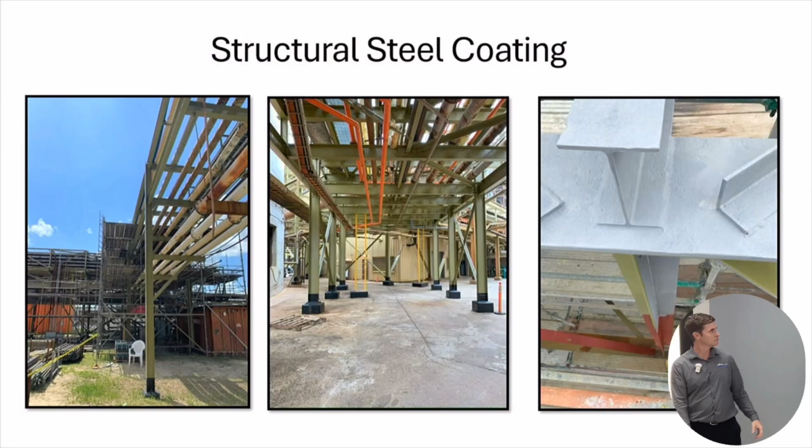Pipe racks, structure. In situations like this, a petrochemical plant, they were worried about gases and gas releases, so they didn't want just a corrosion barrier. They wanted a chemical-resistant corrosion barrier as well, worried about SO2. So we used the ZF primer so that we didn't have to abrasive blast, which was frowned upon in that area. Then we went on with Corrocoat Zip E, which is more chemically resistant. And then we have a Corthane AP3 top coat as well.

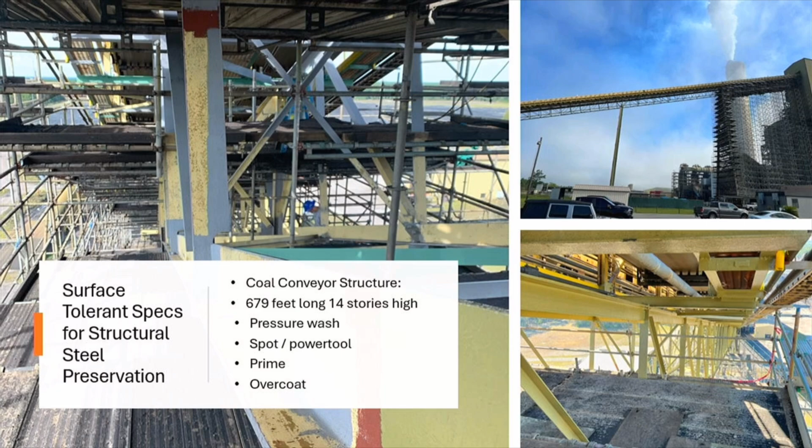This was a situation where we did what we call a spot prime overcoat. So you pressure wash the surface to reveal any weak areas and clean it. The areas that show corrosion or maybe blisters, you use power tools. You prep that to an SP3 with a power tool, remove the corrosion deposits, put the Plasmet ZF primer on. You prime the whole thing. It essentially acts as a tack coat, and then you put a new layer of paint on.

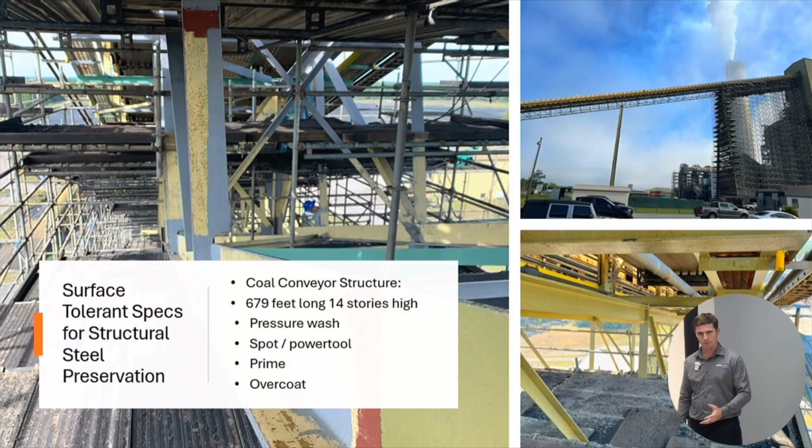This is another half measure. It's a good fabric maintenance practice. Ideally, since everything's close enough here in Point Lisas, you may not even have to have a container on site or a facility on site. Qualitech could probably do that sort of work out of this facility or one of their many facilities.

We can use the AR3, we can use the ZF in addition to a multitude of different Corrocoat coatings that cross-polymerize. Again, this is something we gave them a 5-year warranty on. It had sulfuric acid dripping down and eating away the galvanized structure. We were able to do that despite only being able to use sanding as a surface preparation measure.

In fact, we didn't use the ZF here. For galvanized, we have a sister coating of the ZF called Plasmet Z-Galv, which just gets really good adhesion to galvanized surfaces. We can also use the ZF using a proprietary method that was proven in Vietnam about 12 to 15 years ago.

We're on an actively sweating gas line. We can spray it and get good adhesion. We had a time to first maintenance of 9 years, despite them not taking it down, in Vietnam, which is a tropical climate as well. Spraying that coating on, it actually cures while it's sweating, and it protects the pipe for a long, long time. I know taking your gas lines down is never ideal, but having corrosion eat a hole in it is even worse. So that might be an application you'd be interested in.

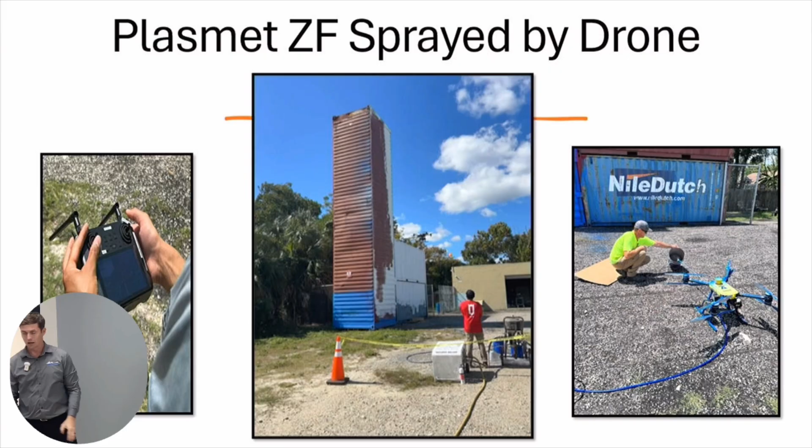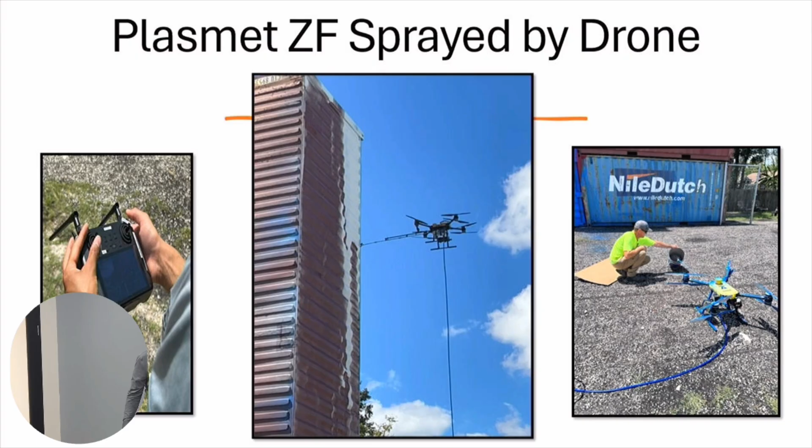On a previous iteration, we had little plates up there so that we could take them down with a high reach and test. We were getting quite the range, but we were getting anywhere from 6 to 12 mils DFT on these plates, and that's just from multiple passes. As you can see here, you can see the drone, and we're cleaning out the tip - that's just standard practice when you're doing any kind of coating.

Plasmet ZF aerosol - I told you I'd get back to it. This is a good product. One of the major oil and gas companies got tired of having their inspectors go around the platforms, take a picture - a lot of times via rope access - of some spot corrosion, then go back to the office and write a report, then there's a work order, and the next day somebody goes out and has to break down a kit to put a little bit of coating on that small spot, wasting 95% of the kit. So they said, can you make this Plasmet ZF, a 2-part surface tolerant coating, into an aerosol? They asked me about it and I kind of laughed and said probably not. Little did I know they had already had this conversation in England, and we were working on it, almost done.

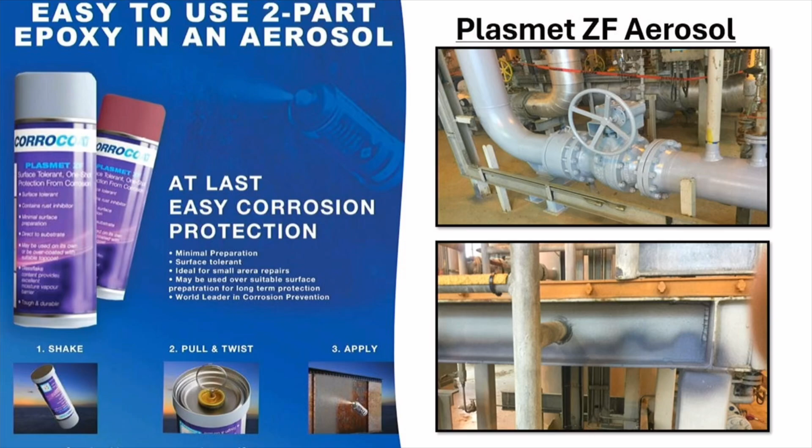So the idea is you shake it up to get the ball moving, which mixes the base. Standard practice - if you had coating in a bucket, you've got to mix the base first because there's settlement, lots of heavy solids in here. So you get that base mixing, then you pull this off. There's a little key ring in here - it essentially works like a grenade. You stick the key ring in a hole on the bottom, pull the pin, and when you pull the pin it activates a blade. You turn it, and that blade cuts a little bag of activator inside. And that's how you have a 2-part epoxy in an aerosol can.

It works really, really well for spot corrosion. So now when those inspectors are going around, they have one of these in their backpack, or they have it in their pocket. You can even pre-mix it. Because it's pressurized, the pot life on this is 12 hours. So in the morning, they're shaking cans. They know they're going to see some corrosion. And then they go around, and when they see something, they probably have a scraper in their pocket, depending on how much surface preparation they're willing to do. And then they deal with it.

The downfall is improper training. So what we've done is we've created a user guide so that you can classify the severity of the corrosion into multiple different levels. If it's more severe, you might use a backpack and use a bristle blaster and power tools. We've even created small 8-ounce kits of chloride remover, which reduce the chlorides.

But once you take that corrosion deposit off, you either do one coat to get about 7 mils DFT. That'll get you, in offshore environments, about a year. That's enough to deal with it before you go back and blast and paint the block. Shell actually tested it to death, like Shell likes to do, and if you use power tools to get an SP10, a near white blast using a bristle blaster, you can get 5 years. So if you do proper preparation, this can be more than just a temporary fix.

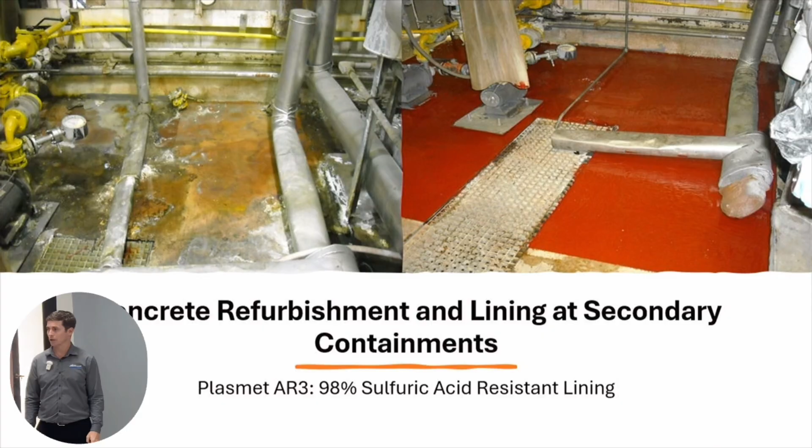The reason why I use the polymer concrete, other than it being more corrosion resistant, is that you can overcoat it with a compatible coating. You don't have to wait 28 days like you would with concrete. And then we coated it with the AR3, the Plasmet AR3, 98% sulfuric acid resistant coating.

More on the polymer concrete. In areas around a tank, maybe you've had chemical corrosion - this tank was actually corroding from the outside in, because whenever they had excursions, it was a black liquor, a tall oil area, so black liquor was getting under the tank and corroding it from the outside in.

So they had a couple of choices. One choice was to tear out the concrete. To replace it with concrete, you need 4 inches, so that's a lot of jackhammer and a lot of tearing out. Or you could use a material that could be primed, and then applied at a half inch. So the minimum thickness of the EPC is a half inch. You can do a lot with that material. It's chemical resistant, and then you can go on with a more chemically resistant top coat.

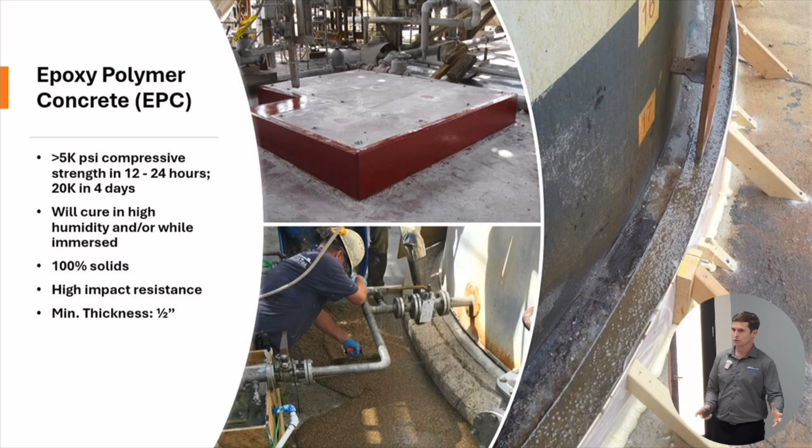Use it for tank bases here. Some customers, like phosphate mines, have so much corrosion problems on their concrete, they just want a polymer concrete pump base - they just take the concrete completely out of it. We can do that with epoxy, vinyl ester, polyester. The resin systems can be matched to the given service.

Another cool application, at the interface of the steel and concrete - in areas, you've probably seen a lot of columns that start to be eaten out like that. That can be a problem. It's a reliability problem, and if it's left unchecked, it can be a safety problem. Prime it with a ZF, form it up, put some epoxy polymer concrete in, and never worry about it again.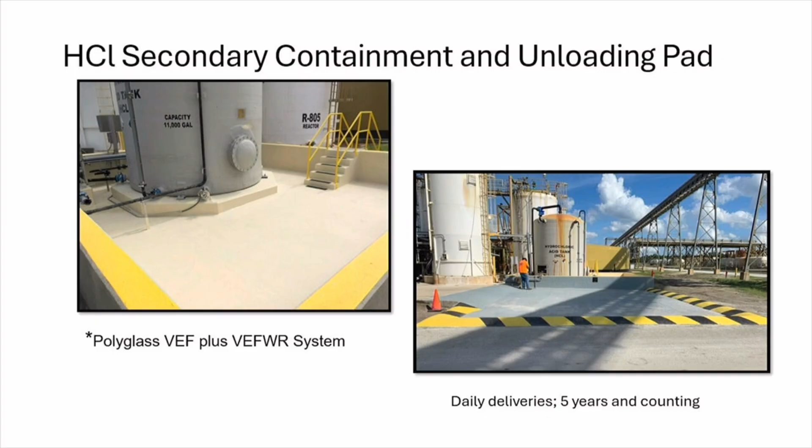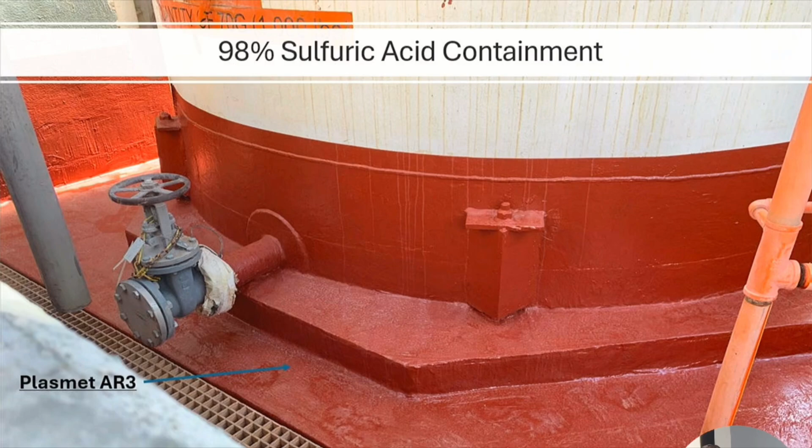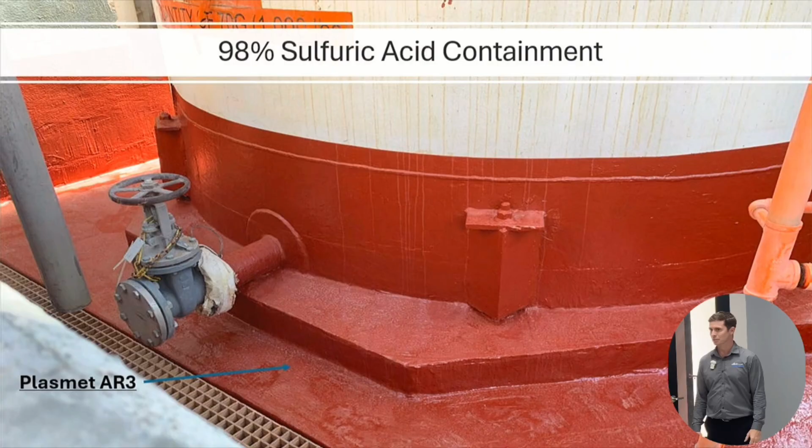We're given 5 years warranty on sulfuric acid secondary containments. There is a commercial side to that, of course, nothing's for free. But if you're looking at reliability, if you're dealing with concrete issues or corrosion issues that you have to continue to deal with, eventually somebody's going to say let's just bite the bullet and do it right. Competitive bid situations can be more expensive than they're worth in some cases.

And then U-drains. It's not my men's favorite thing, but if you have U-drains in a demin area or deionized water or any chemical plant, you probably have problems where those U-drains are leaking into the earth. U-drains are particularly difficult because they're designed to catch water, and coatings don't like water. So it takes some experience and logistics and different puddle pumps. We build temporary dams and move water where we need to move it, and we get in and use composite materials to solve the problem.

So, how to work with us? We're on the home stretch. If you have a problem that you either don't know how to deal with, or maybe you've been trying to solve for a while, contact Qualitech. We're going to go through, we have a form, but a lot of times it can just start with a site visit or a conversation and or an email.

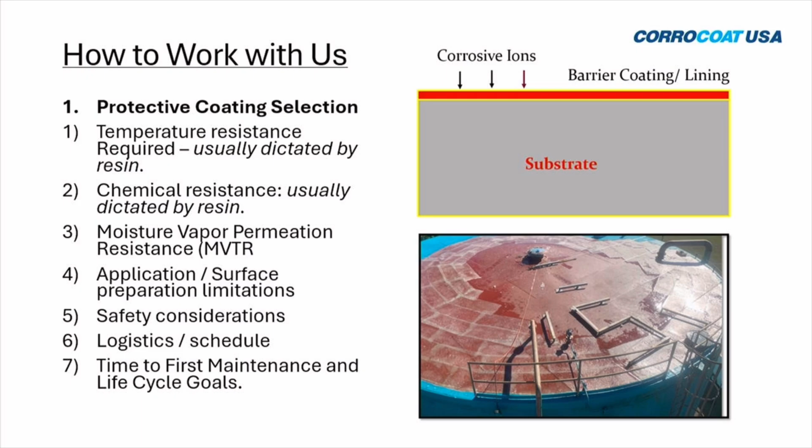It can either just be a specification that you're going to put in your bid. It can be a budget price because you're at an early stage and we do it all, so we can give you a budget price. Or it can be a quote whenever you're ready to buy.

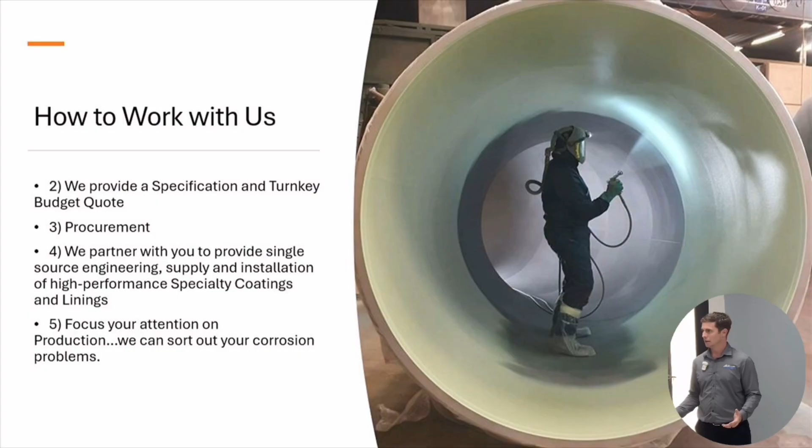We execute. We inspect on regular intervals as needed. And then you can go back to worrying about other stuff. Corrosion shouldn't be at the top of your mind. There's a lot of other things to worry about as an engineer. Let us handle the corrosion problems.

So that's it. Corrocoat are specialists. We partner with Qualitech. We can do some amazing things for your worst corrosion problems. I appreciate your time and attention. Any questions?

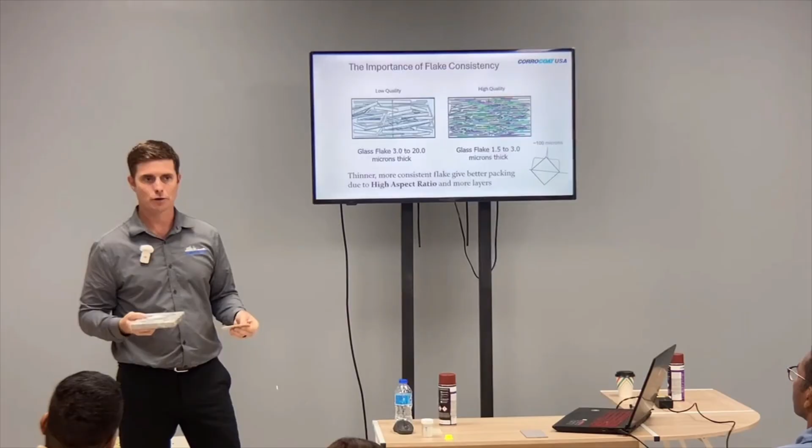So right here - aspect ratio, that's the ratio of the thickness to the surface area. So for instance, this has a given aspect ratio, the thickness to the surface area. This has a greater aspect ratio - it's thinner versus the surface area. If I were to drop both of these 1,000 times, there's a high likelihood that a certain percentage of those...

...this guy is going to line up like this, or maybe like this if you're in a film like the glass flake and the coating. Whereas if you have a perpendicular force on a high aspect ratio glass flake, or anything that's flat like a piece of paper, it's going to want to stay flat and parallel to the substrate. This is really important when you're looking at barrier properties to glass flake coatings.

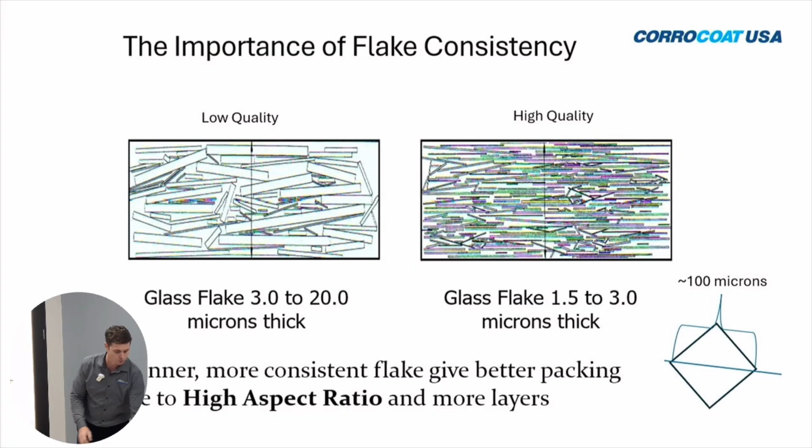When you use lesser glass flakes, those glass flakes have a chance to wick, and then they're just not going to give you the same tortuous path. The idea with the tortuous path, and this works the same as if you - mouse problems again.

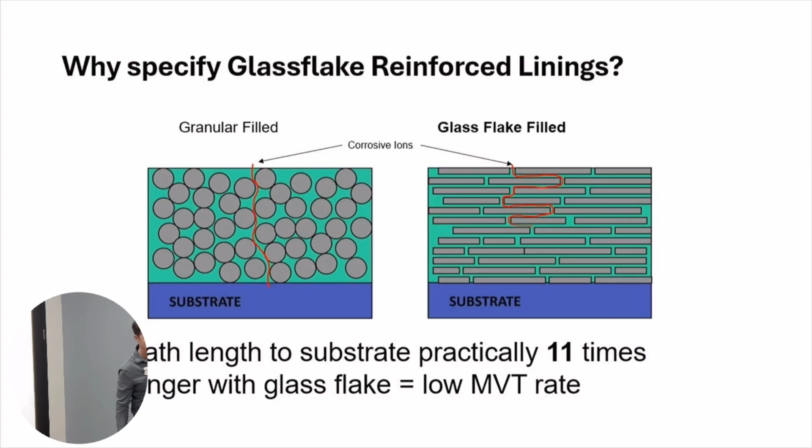So if you don't have a thick enough coating for the given surface - we specify that based on the surface - or if the glass flakes are such that they don't give you enough of a path, you're not going to stop the flow of the corrosion-causing ions. They're going to get to the bottom, they're going to start corroding, and you're going to end up with a bubble over a given amount of time.

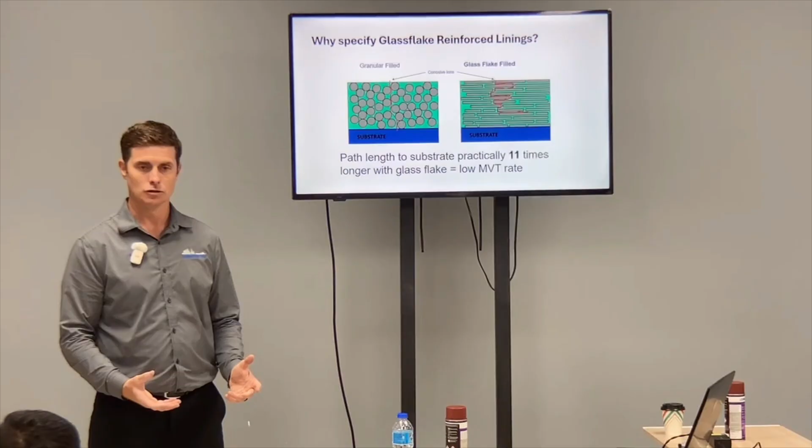That's the key reason why Corrocoat started making their own glass - it's that important. There's no ISO standard for glass flake coatings that says it must have a certain performance value. I wish it did. We should look at performance-based properties.

So there's a lot of coatings out there that say they're glass flake, but they can take just a little glass flake and do one of these in there and call it a glass flake coating. It may or may not have the same performance value as a well-engineered glass flake coating with high aspect ratio thin glass flakes.

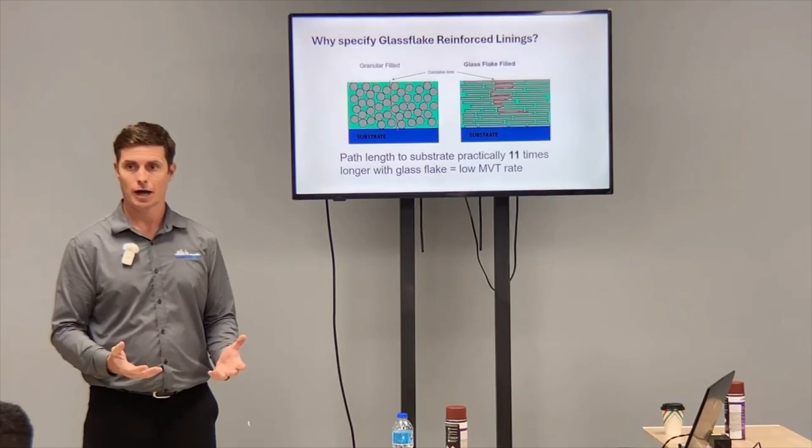Make sense? Yeah, I kind of breezed over that earlier. Thanks, Deepak.

Anything else? Everybody hungry? Time for a coffee? Well, if we have any more questions from anyone, don't feel shy. It's a very small, closed group here, so you can feel confident.

So one of the popular glass flake coatings in Trinidad among the customers is polyflake. So how does Corrocoat stack up against polyflake? Full magnitude better, the last time I compared the data sheets.

So we'll outperform that, and then you'll also have a partner who's been trained, who can do that and take full responsibility for the product. Well, I'm happy to take the Pepsi challenge with them any day. Okay, great. Thanks.

So I have two questions. My first one is, since we're speaking about the aspect ratio, do we have any data in terms of a factor that we are also improving the strength of the base material, or is that something we haven't really compared to something that's being lined?

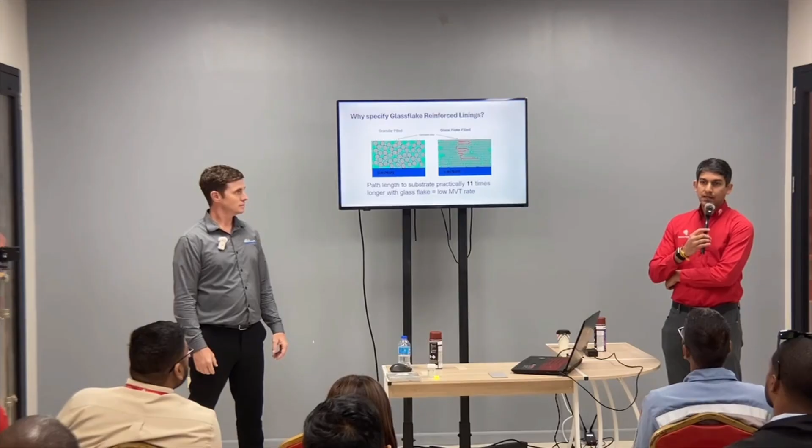And I think as we get more into Corrocoat in Trinidad, you'd realize that this is an engineered solution. It's not that we're just trying to sell a coating. Many of the examples Josh would have given, you'd have seen where it's way more than single-digit years, not 2 years, we give 5 years, 10 years. And it really stands up because of the amount of effort we put into the fact-finding.

So Josh always uses the analogy of going to a doctor, where you get like 10 questions asked before you get something prescribed. That's exactly what we try to do as well. It's not that we're just going to give you something to use immediately. A lot of fact-finding, because we want whatever application you have to be successful.

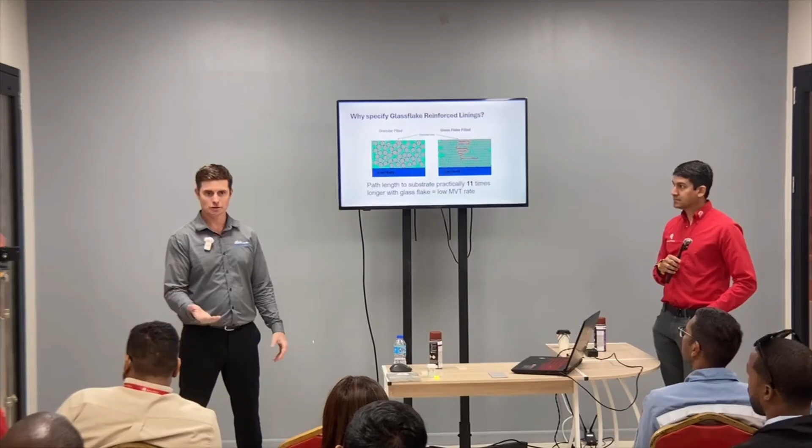Yeah, well put. There's got to be one more out there. Yeah, well, I think we have box lunches, right? Yeah, so we'll be around. We have some refreshments, so we could casually chat about anything you guys want.